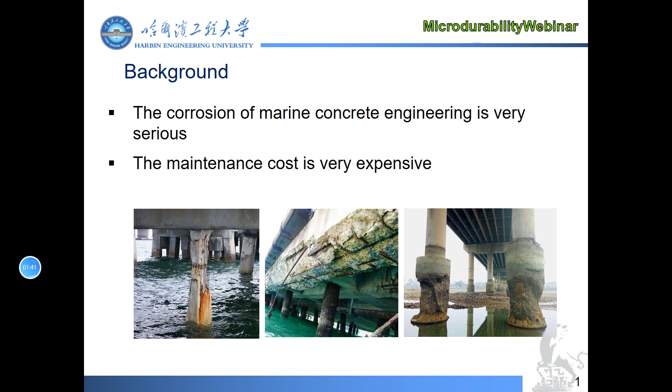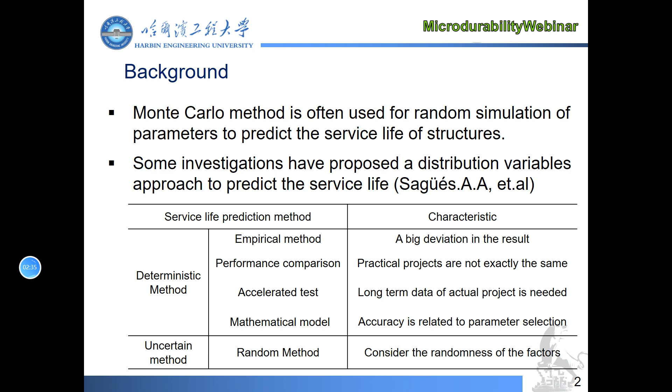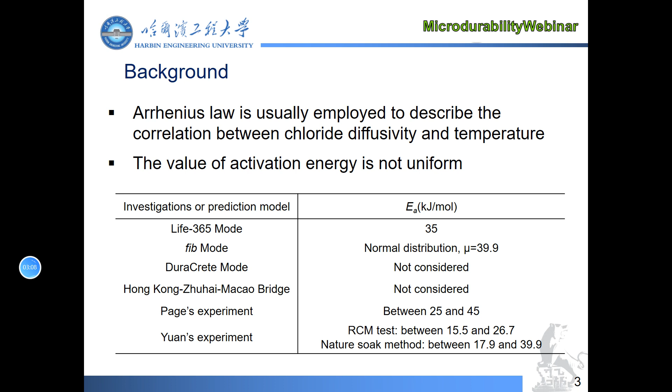It is well known that temperature has an effect on chloride diffusion. Arrhenius law is usually employed to describe the correlation between chloride diffusivity and temperature. About the value of activation energy in Arrhenius law, there is no universal method. The values in investigations or prediction models are specified in the following table, and most of them are constant values.

But many researches have shown that the activation energy varies with the diffusivity of concrete. Based on the analysis of RCM test results, Liu developed the correlation between non-steady-state migration coefficient at 21 degrees Celsius and activation energy, as shown in the figure.

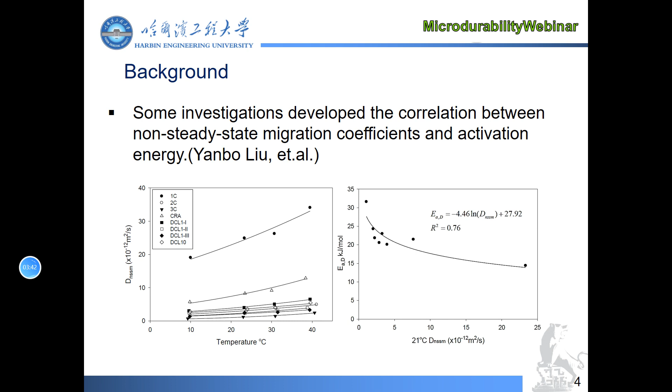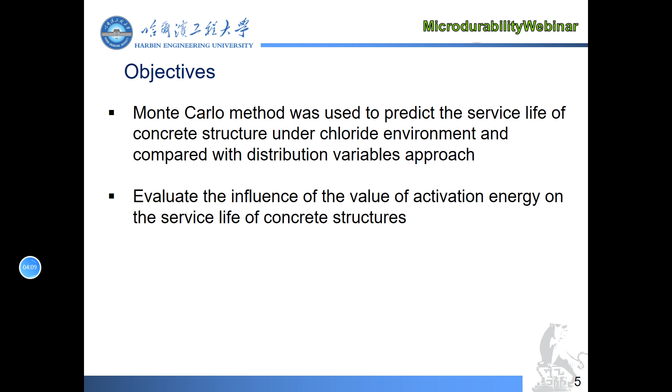To sum up, the objectives of this study are as follows. One is to use Monte Carlo method to predict the service life and compare with distribution variables approach. The other one is to explore the influence of the value of activation energy on the service life prediction.

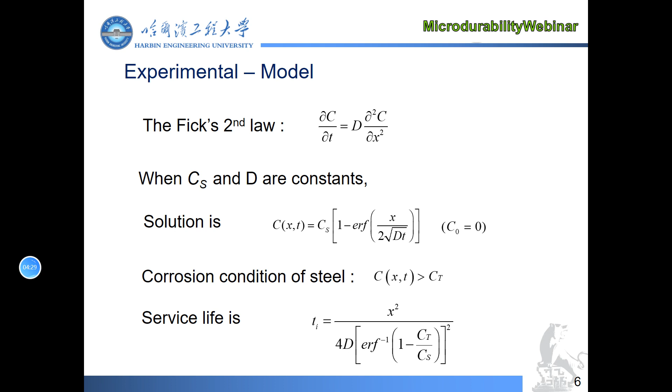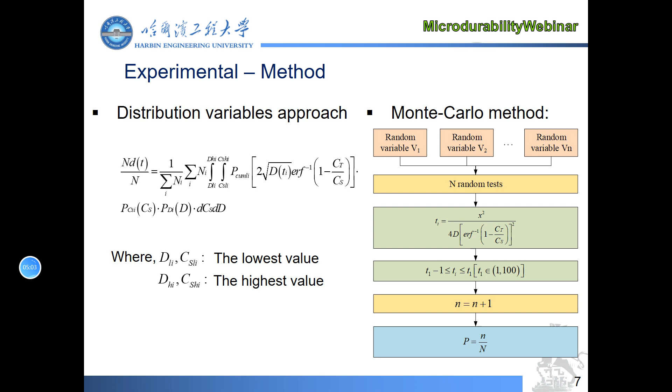Model setting is based on Fick's second law. When the chloride concentration reaches the threshold, the steel is considered to be corroded. The service life can be expressed as follows. Distribution variables approach is based on the idea of finite element. The probability of structural failure is obtained by comparing the damaged elements with the total elements. But Monte Carlo method calculates and records the probability of service life at each time point through random sampling. The process is shown in the figure.

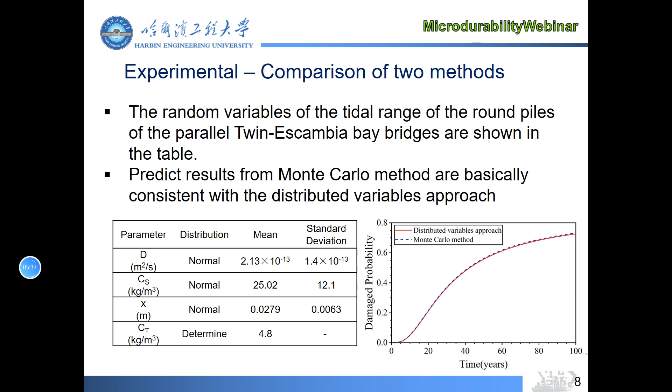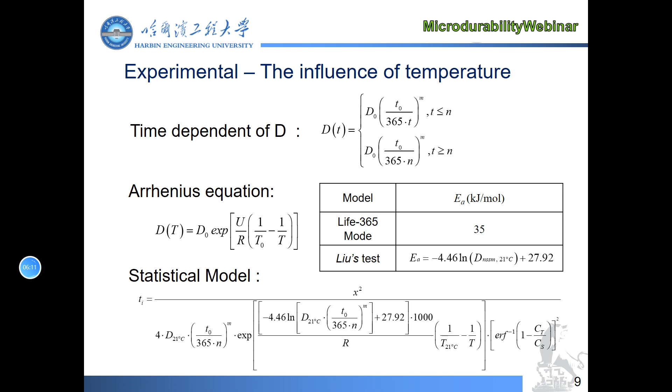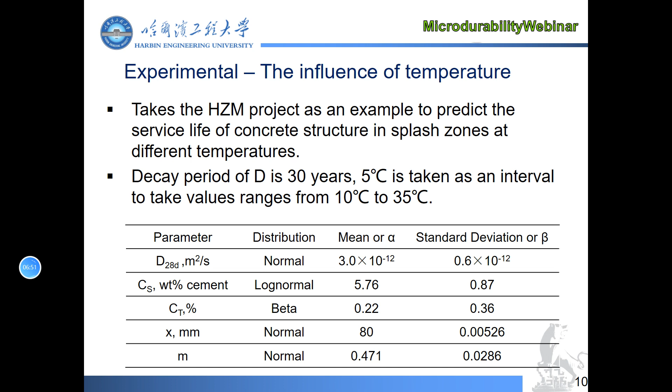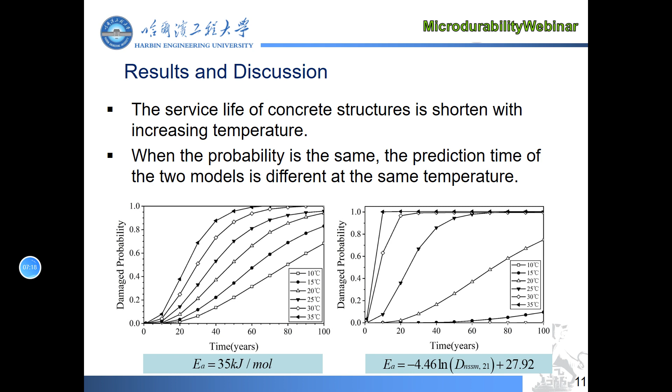The picture shows comparisons of damage probability under different temperatures in two kinds of activation energy value methods. We can see from the picture that the service life is shortened with the increasing temperature, but when the probability is the same, the prediction time of the two models is different at the same temperature. The comparison of probability changes at different temperatures are shown in the next few figures.

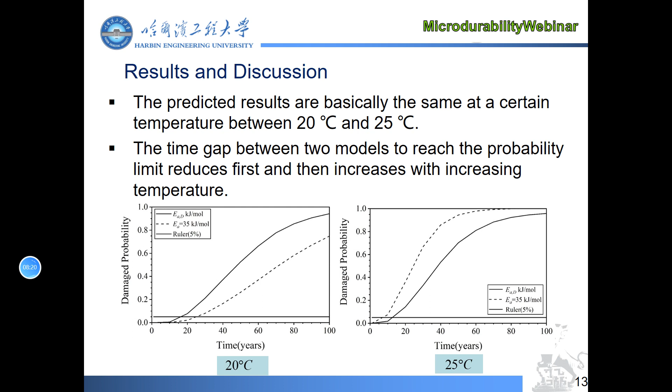This is because the activation energy value at various temperatures calculated by the test formula differs from that in Life 365 model, which results in a large difference between the mean value and standard deviation of chloride diffusion coefficient calculated by Arrhenius equation. This illustrates that the temperature sensitivity of this model is greater than that of Life 365 model.

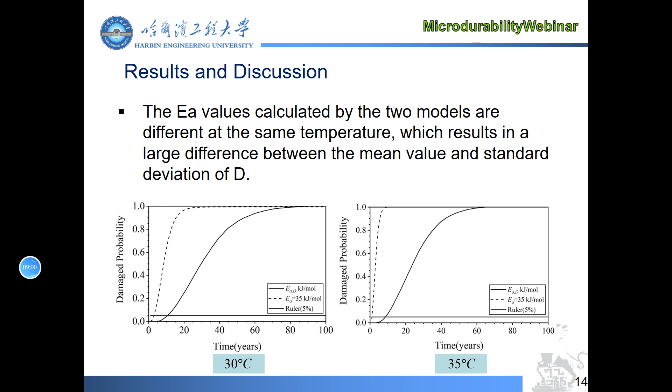To sum up, the results predicted by Monte Carlo method fit well with those predicted by distributed variables approach. There is a difference between the service life by the model in the paper and the Life 365 model. The correlation between migration coefficient and activation energy might provide a reference for the durability design.